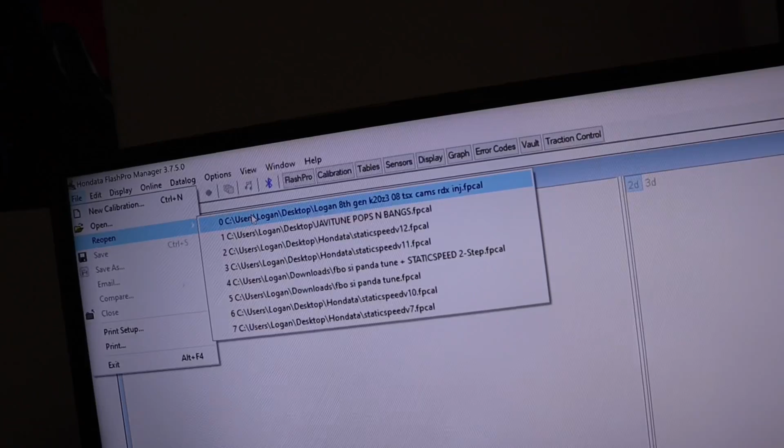I'll just do it on a generic tune that I did for Majestic UA7's TL back in the day. It works on Acura TLs too, since he also uses Flashpro.

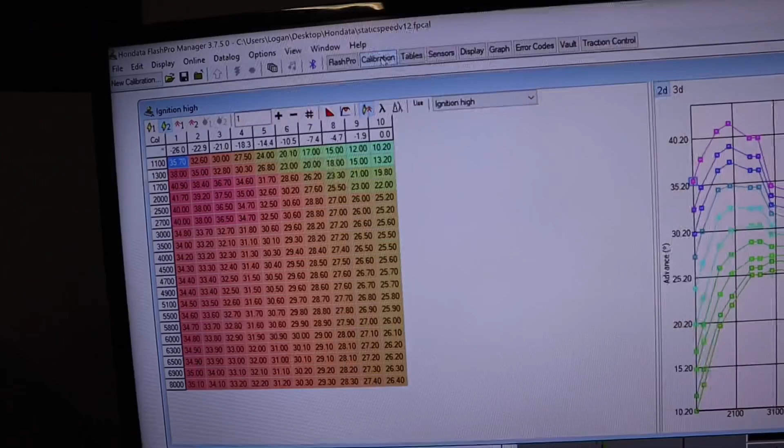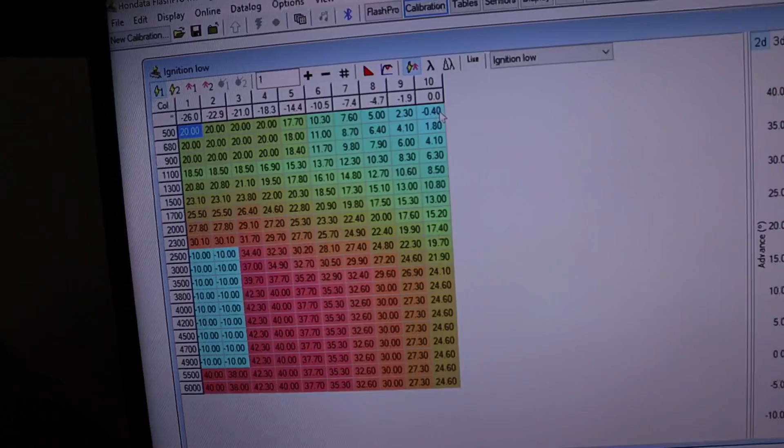First off, it takes me straight to the ignition map. If you're not on this, go to Calibration up here, then Ignition, and start on ignition low. You'll have the table here, depending on whether it was tuned by someone else or a base map or whatever — it's pretty simple, actually.

What you're going to do is go to the left two columns here, column 1 and 2 — that's your low load column, which is pretty much when you're off the throttle. I have this set up from 2500 to 4900, so out of VTEC, about 2500. You can do it a little bit lower if you want, but I figure 2500 is fine — you don't need to pop and bang any lower than that. That's pretty much going to be your sweet spot.

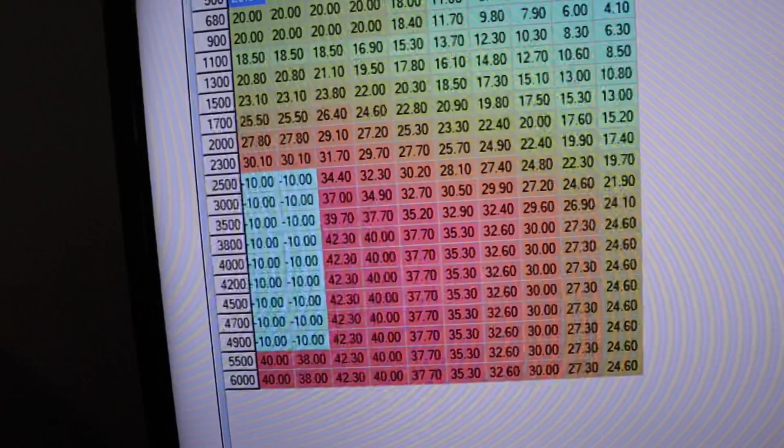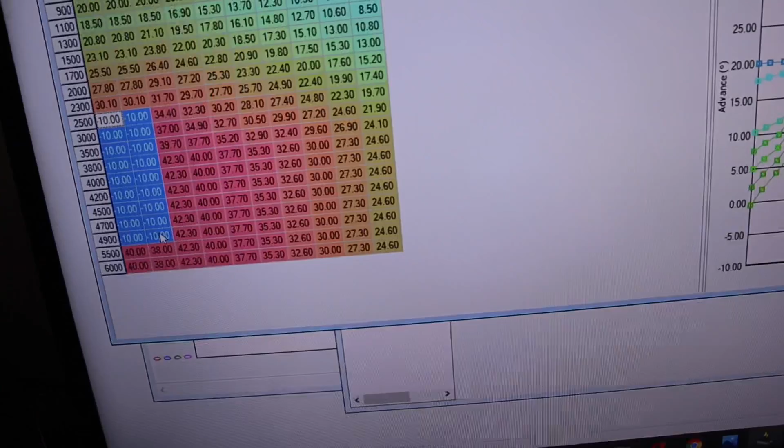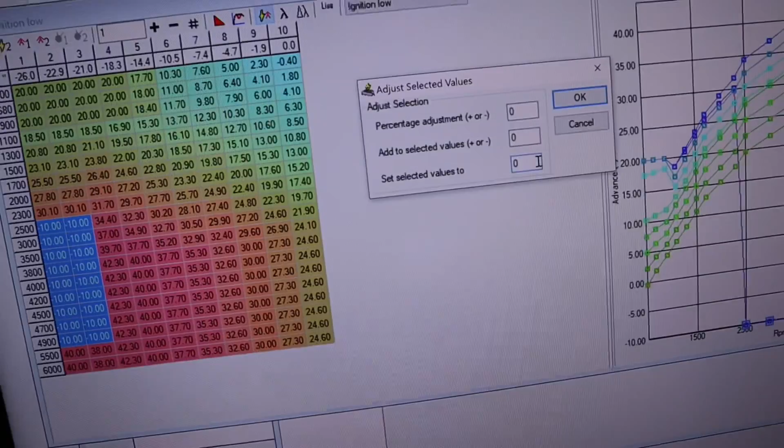If you guys don't know how to change this, highlight the columns you want to do here — make sure you get all of them. Then right click and it'll say Adjust. Click on Adjust, Set Selected Values To, and max that out at -10. Some of them go to -20, but on this specific one -10 is as far as you can go, so it sets them to -10 right there.

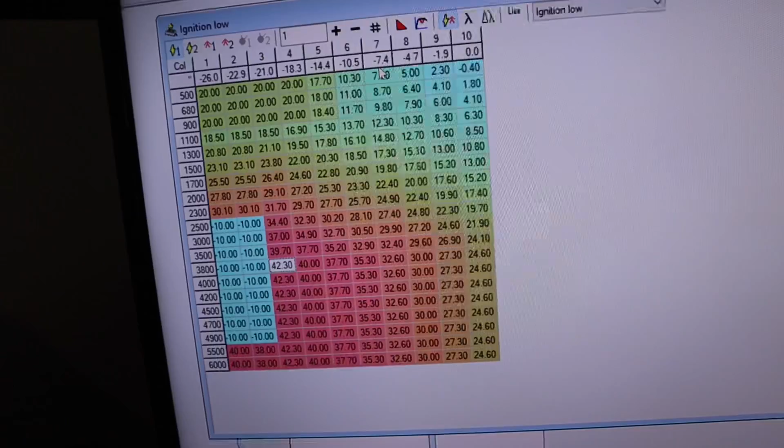If you have one with VTC, like any of the Civic SIs or whatever, it'll have the different degrees up top — it'll say 10, 20, 30, 40 degrees across the top. Make sure you set it for all of them. Once you've got all those set to -10, that's your first step.

Next thing we're going to do is go back to calibration, and then go to fuel. In this menu, it's going to look a little different depending on the car or ECU. You're going to look for overrun fuel cut delay right there.

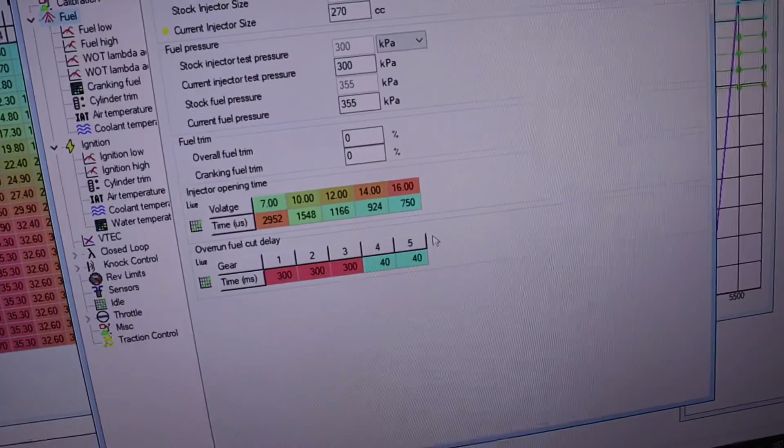Right now you have the different gears going across here, these are in milliseconds. I figure 300 milliseconds works fine. I've done up to 1,000, but that pretty much just constantly pops and bangs until you get back on the gas.

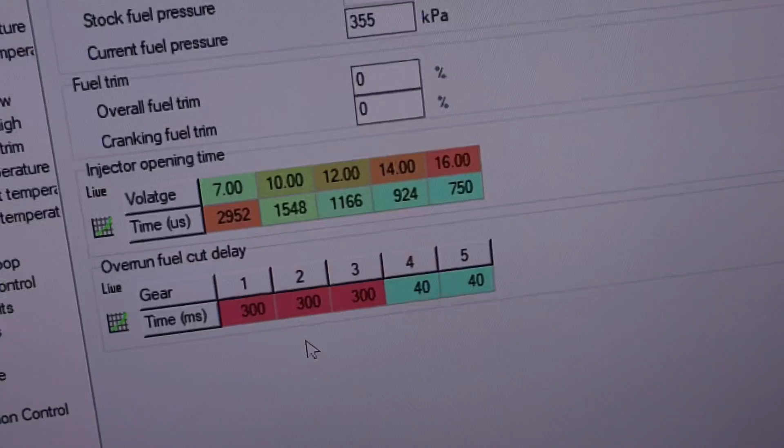You can do that if you want to be obnoxious. You can do anything from 150 to 300, that should be fine. What that's going to do is after you let off the throttle, it's going to dump some fuel into the exhaust still, even though the throttle's closed, so it's ready to be combusted once you have the ignition retard there, the -10.

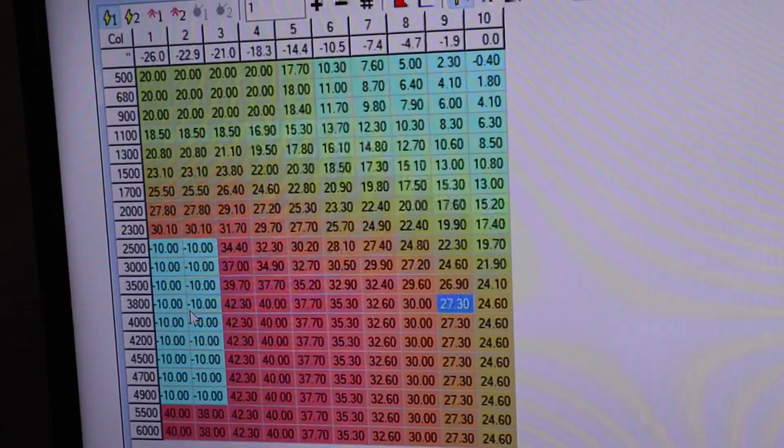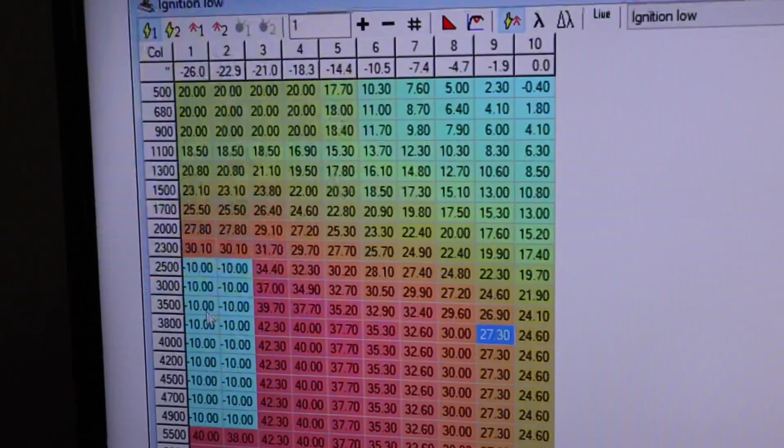It'll pop when you let off, but if you get on the throttle and barely tap it, or intermittently tap it, or barely hold it at about 5%, it'll keep adding fuel and keep using these columns here, and keep retarding the ignition, and you'll get a ton of little fast burbles, and that sounds pretty cool too. I'll include some sound clips here so you guys can see exactly what I'm talking about.

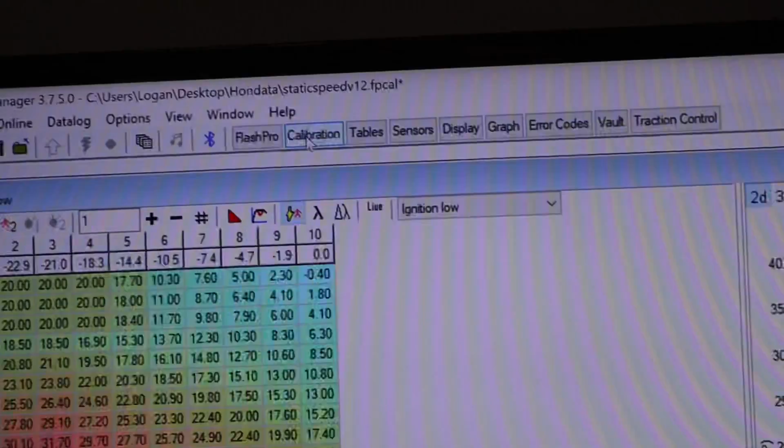Alright, now what you guys have all been waiting for, the two-step. This is going to be a lot different depending on the car.

On this one, what you're going to do is go to rev limits here. Actually, this is a bad example because he does not have anti-lag on the TL ECU. So give me a second, let me open up a Civic map.

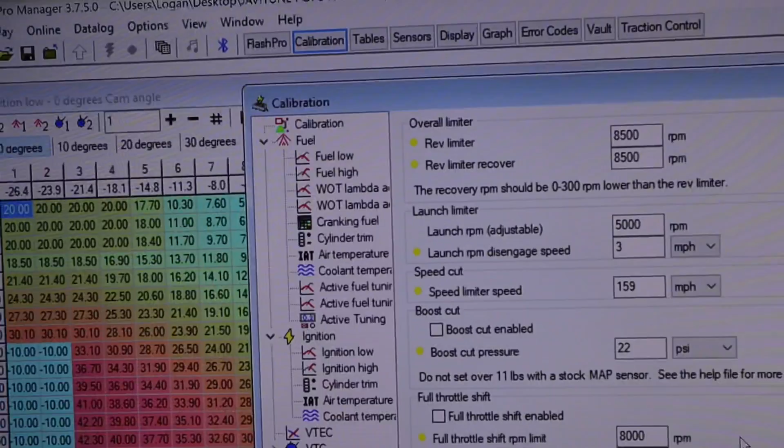Alright, I'm on the map for my Civic here, so there's a couple more settings as you guys can see. You're going to go down to anti-lag here at the bottom, and these are the magic numbers for my car, every car is a little bit different. The 4750, that's when it's going to start cutting the ignition and adding fuel, rather than just doing a hard fuel cut two-step, that sounds really ricer.

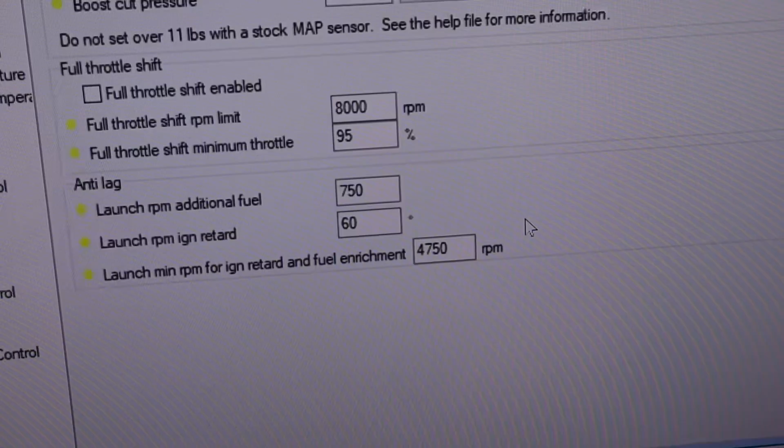That's what the car comes with stock, except it's at like 5500. This one's going to be a lot quicker of a two-step at about half throttle, and then the more throttle you give it, it's going to become a little bit slower, but it'll actually start to shoot the flames.

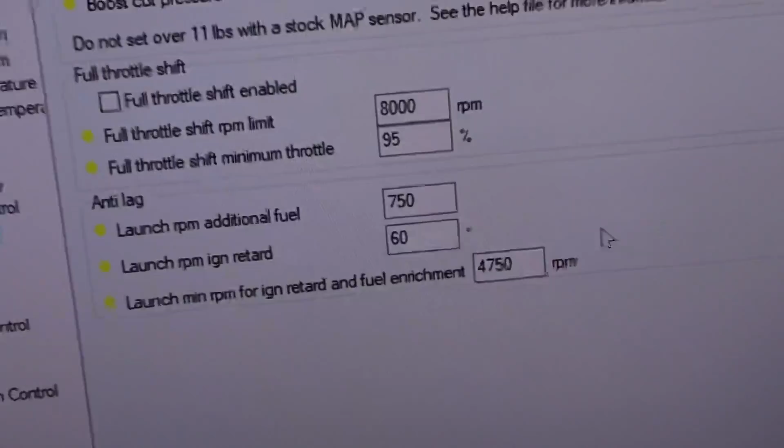So I have the additional fuel set at 750 and the ignition retard at 60. That means no matter what ignition you're pulling, whether that be 36, 32 or whatever, it's going to retard it as far to -10 as it can, so it'll be completely cutting the ignition.

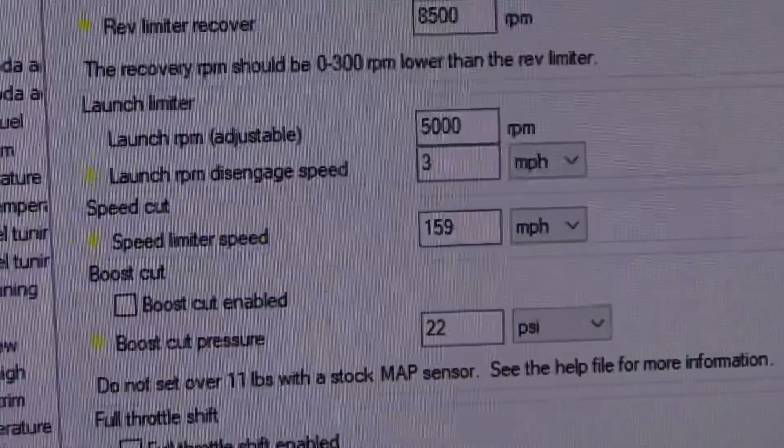Then whatever you have your launch control set at - I have mine at 5000 - that's going to be where the hard cut is, where the big flames are at. So I figure it's best to do it at 4750 if you want a quick little two-step for half throttle if you're actually launching the car or something on street tires.

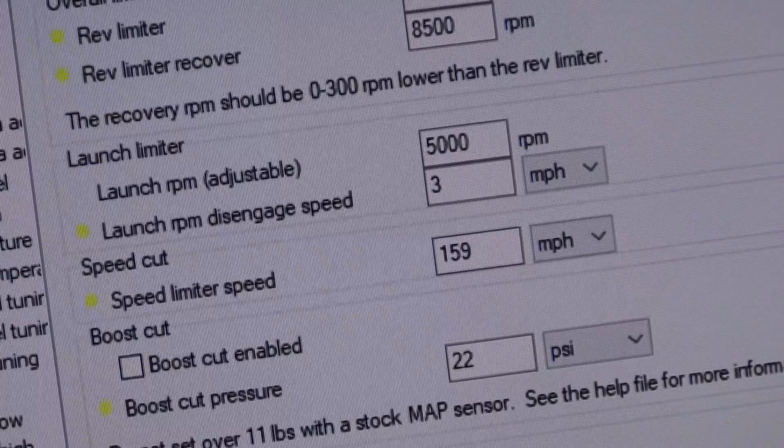As you floor it, the RPMs will slowly climb. It's going to seem a little sketchy, but once they finally hit what your launch RPM is, then it's going to be really nice, it's going to have some really nice flames.

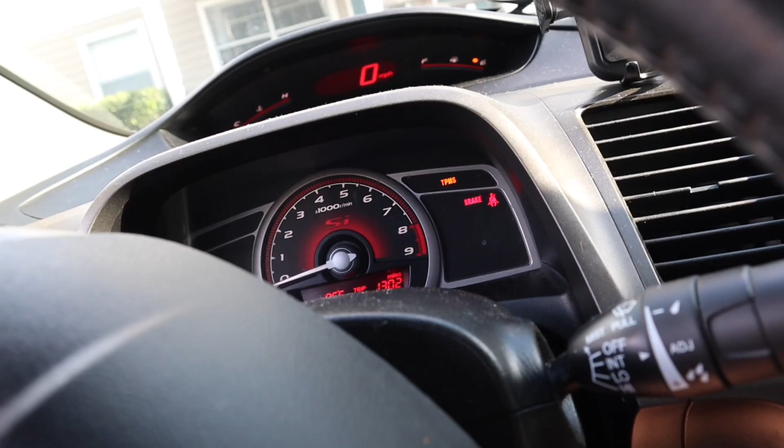Alright guys, if you've never flashed your car before and you're just editing the base map, which you've probably already flashed, key in the on position, got the map pulled up right here, and then you want to save the changes first, and then you're just going to click upload right there. It's going to start uploading now. I'm going to put the pops and bangs map on with the two-step, show you guys exactly what it does.

Alright guys, I'm going to show you the technique I was telling you about with the throttle. I don't have mine on the ignition high, just the ignition low right now, so we're going to be doing it out of VTEC. Hopefully you guys can see my feet.

Alright, so if I just let off the throttle in third, it doesn't really pop until you barely tap the throttle. Or you can hold the throttle at like 5%. Or if you want the big pop, you let the revs go down, wait, and then tap it. You get a nice big one, and that one usually shoots out the flame.

See, I'm just jabbing the throttle. Resting my foot like 5%, and then you'll get the really good burbles. See if we can get some good ones under this underpass here. Yeah, it's all about the throttle manipulation. But if you can figure that out, it takes a little bit to figure out what's perfect for your car, but then you'll get some really nice pops and bangs.

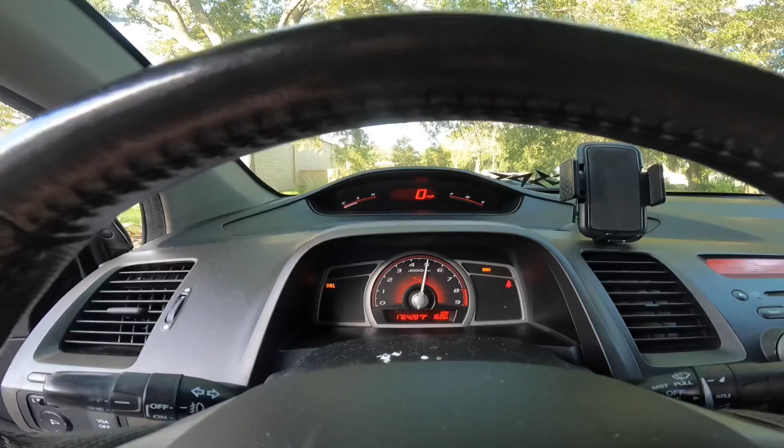I'll show you how to set the two-step if you don't know already. You set it in Hondata at first, but pretty much what you're going to do is clutch in, then you've got these buttons here, you're going to hit the cancel button. That'll show you where your two-step's at. Mine's at 5 grand, I figured out for my car 5 grand is the perfect setting. I'll show you guys real quick though, if you go in half throttle, it'll actually start cutting the ignition at 4750 and do a little quick two-step.

No flames or anything, but that's just a good launch two-step right there. I figure 4750 is perfect for my car. And then I'll show you guys, when you floor it, it'll creep up to about 5 grand. Pretty sick. So I'll show you guys from the outside. Might not be able to get any flames because it's not dark, but we'll see what happens.

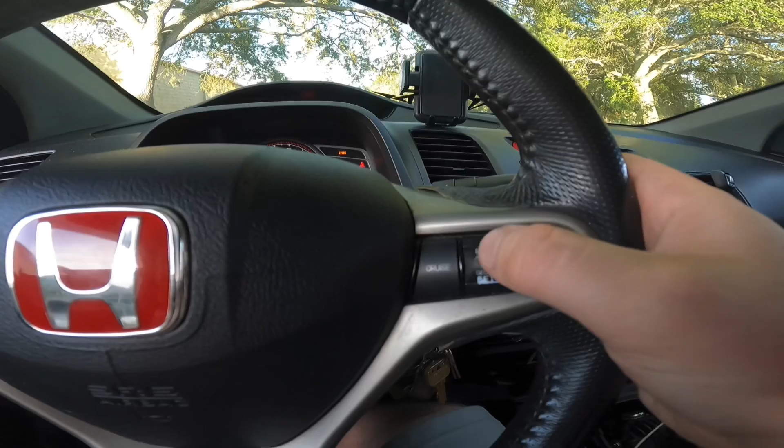On that last one right there, what I did is I held the cancel button. As you see, the two-step is up there. What you're going to do is use the cruise control up and down. Let's say you want to go up a couple RPM, you're just going to hit the up button. And then when you hold cancel, it shows you what it goes up to. So you can use these buttons to lower it down if you want.